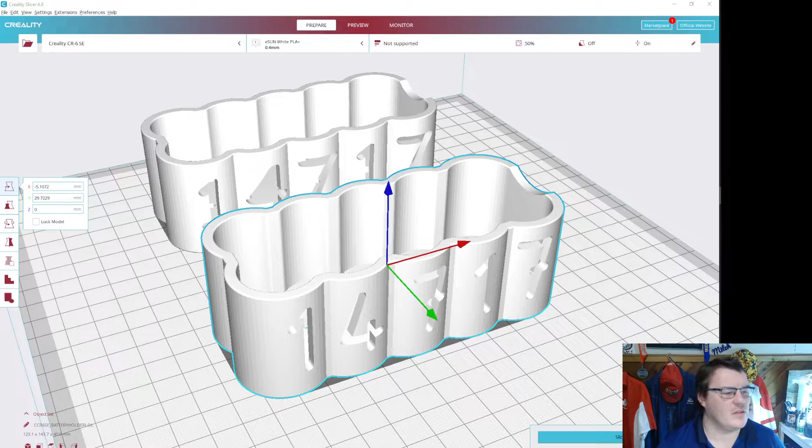First of all, kudos to the guys for actually pulling this one off. This is a very nice battery holder. It actually has a few features here. It has the Rev pattern on the bottom to attach to a bar, it has the team number built right in, which I think is value added in a couple of different forms, and it looks like it's contoured to the battery.

Now, it left me with a couple of questions, and I wanted to walk everyone through how to design one of these with a couple more advanced features. Of course, this video is going to be sent back to my team for next week so they can re-engineer these and we can take another shot at them.

That being said, let's jump into Fusion 360. Now, in Fusion 360, I've got a few things going here. First of all, I've got an untitled document. I'm going to draw this up as if you're a relative beginner to Fusion 360. I want to walk you through the steps, show you a few things, and hopefully you learn something from this.

With Fusion 360, we start with an untitled document. I'm in a folder right now called Team 15259, which is another one of our FTC teams. I'm going to save this here because it's someplace I'll be able to find it. Battery holder — give it a good descriptive name, something you can work with. If I have more than one battery holder, I might be more descriptive on that one.

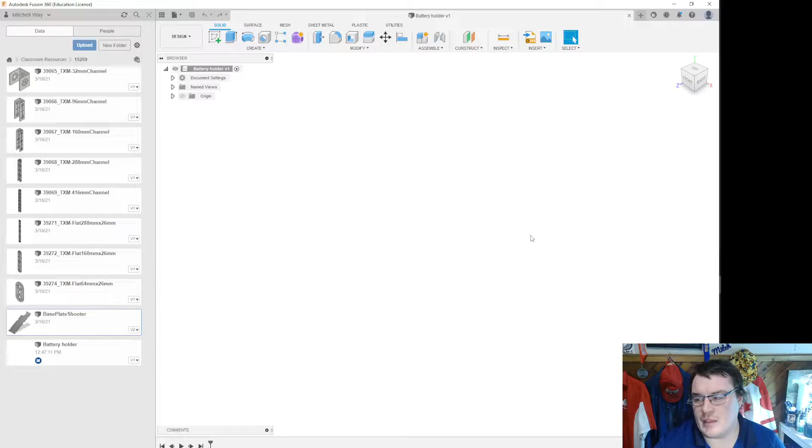Now, for this battery holder, I'm going to need a couple things. I'm going to need the Rev bar that it attaches to, or the actual Rev part. I'm going to need the Tetrix bar that it's going to be attached to, or the measurements of the Tetrix bar that it's going to be attached to.

Now, I just want to throw out a shout out here to Team 542, who has one of the best Tetrix reference dimensions pages on the internet. They do a great job, and I often use these to actually draw out the patterns. So I'm going to show you how to draw the pattern, and I'm also going to show you how to just project the pattern. That's going to require a few different tools.

The other thing I've got here is these actual bars. I'm going to upload the battery part for Rev, and for Tetrix, so that I get the actual part I need to base the design off of. So I'm going to go to upload, jump into my test prints, my desktop, and into my CAD library. I've got CAD files here — Rev, FTC kit parts from Studica, and Tetrix.

Now, the actual part you want for this is 39057, or whatever part number your battery has. In order to actually find these step files, for those brand new to this type of CAD, you can jump onto most suppliers' websites.

So here we have Tetrix, we have the battery we're about to work with, and we actually have a download button down here, and you can see they've provided the step file for this one, which is excellent. I already have it downloaded, so I'm going to upload it into this folder. Another good idea in CAD is to have a master part file folder, so you can bring parts over from it. Right now we're going to do this because it's a little more convenient, and we'll make it go from there.

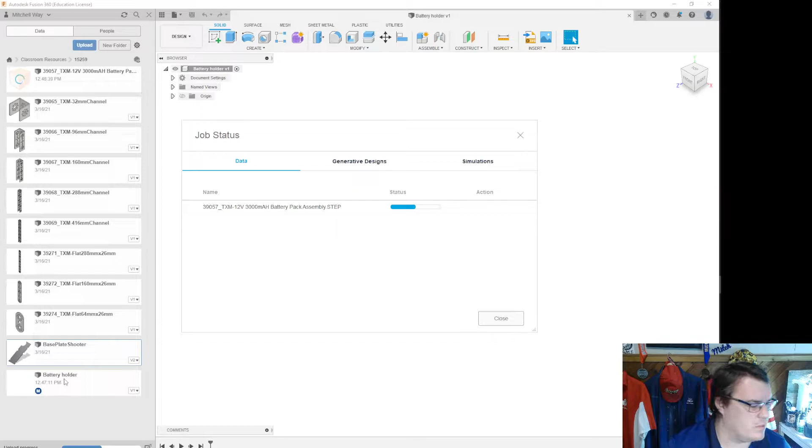Now, when we're here, we've got this battery holder, and I'm just going to close this down. This upload is going to continue, and we're going to get ourselves stuck in here on what the actual interface is and some of the important tools. The very first of which is that we are going to bring this battery into this drawing by clicking and dragging, and this is going to create a new component.

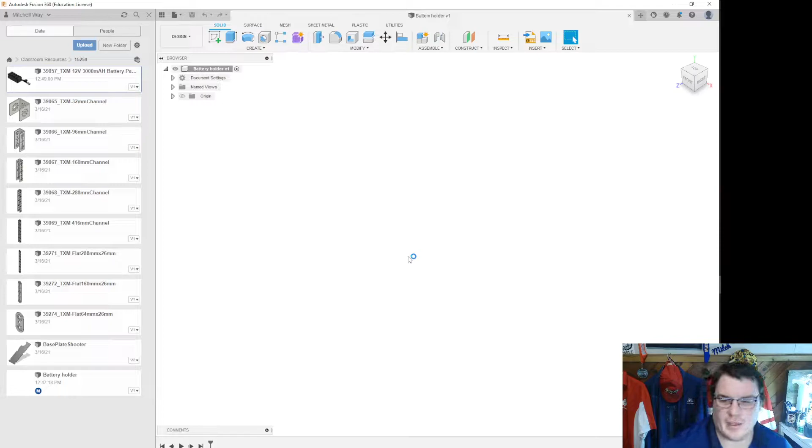Now, up here in this browser menu in the top left, we have all of our components listed, and we're going to be creating a couple of different things. We're going to be creating what's called a body, which is kind of like a component in progress to try to build the battery holder, but I actually want the battery here so I can measure things from it, because that's very important. I'm just going to drop it in the middle, as long as it's oriented so the top side is up.

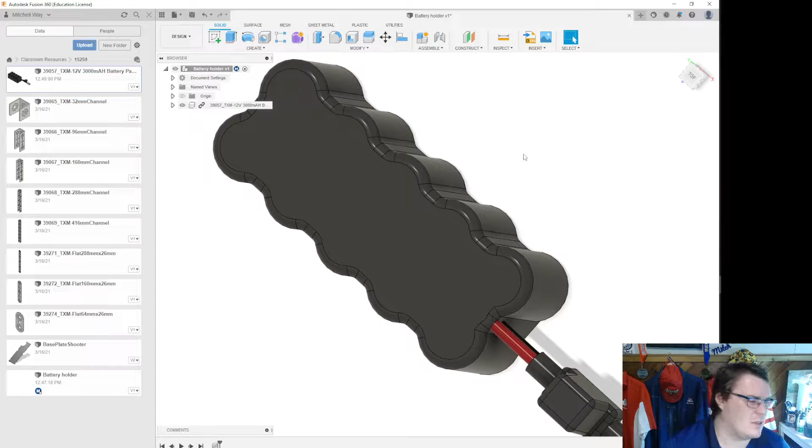There's no problems there. Now, I'm going to make some design decisions here. Unlike my team, who decided to make a battery holder that followed all of the contours of this, I'm actually going to make a battery holder that follows the contours on the inside, but is probably rectangular on the outside. And I'll show you why in a bit, because they missed a part that I think is going to make this way more functional.

Now, we're going to start every drawing with a sketch. So to start this, I'm going to create the outside shell for this particular battery. That shell is simply going to give us something to start working with. So what I'm going to do is see what I have to work with here. I think the easiest thing to shell this based off of is going to be the top panel right here.

So I'm going to start with a sketch, and I'm going to click this top panel. Now you notice we jump into 2 dimensions, and I can select the top face of whatever we had there. If I want to bring in faces that weren't part of that selection initially, I can use this button up here called Project. Your Project button is down here in the Create menu, but mine has simply been use the 3 dots here, and I've pinned it to my toolbar because I use this tool a lot.

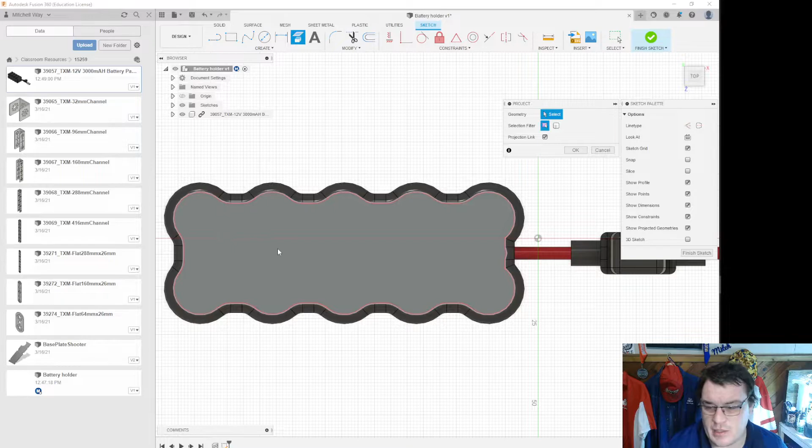So here we go, let's project out what we need. In this case, I'm just going to project out the top of this. I don't need to do this because I started with it in my selection pane, but it's going to make this next step a little bit easier.

All right, now what I'm going to do is use what's called an offset button. It should be up here in your toolbar. I'm just temporarily going to close this bar down so we can see more. And with the offset, we can select that line we just created and offset it a certain distance.

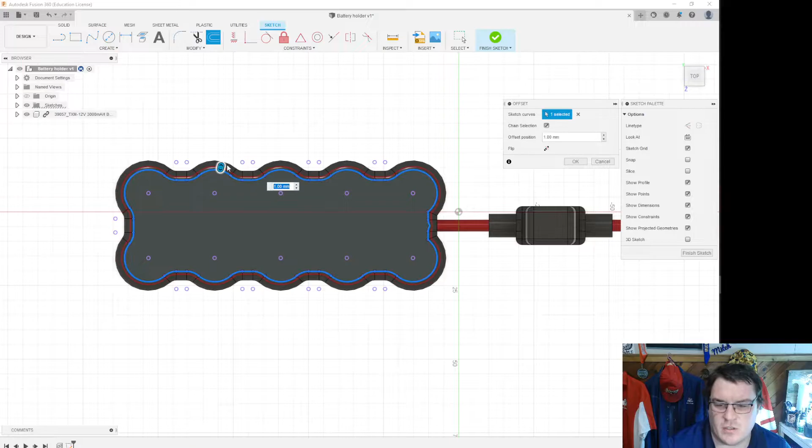Now, one of the things the team did that I didn't like as much is I think they just used the outside of the battery as their offset. If that's the case, that's not so good, because when you 3D print this, you're going to add somewhere in the neighborhood of a tenth to a fifth of a millimeter to the edge of all your prints, just because of how nozzles often work, depending on how your printer's calibrated. That means I want to make sure I have a little bit of space. If this battery moves around by a little bit, I'm not that concerned.

If it's too tight, we might have a problem. So I'm going to pop it out here, and just to see what I've got, I'm going to zoom in on a part of it to see what the gap is between the battery and what's now going to be the holder. I'm going to do a project on one of these lines so I can select it.

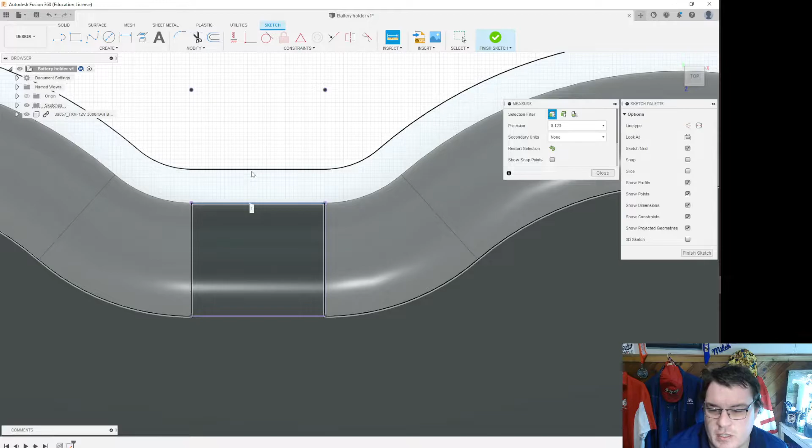I have a couple choices. I can use my inspect tool here, which is actually really good, and inspect the distance between these two at 0.9 millimeters. I think a less than 1 millimeter gap on each side is probably something I can live with, especially with the tolerances of batteries—they may not be exactly manufactured to what they're supposed to be. So we're pretty much guaranteed that we've got something that will work here.

Now, from here, I'm simply going to decide what I want to be the outside of my battery here. I said I was going to do a rectangle on the outside of this one—debating on that decision right now. Let's do this, let's grab... yeah, we are going to do that. We're going to use that same offset tool here to get started.

In this case, I am going to—oh no, we're not going to use the offset tool. We're going to use a line tool here and drag out a new line. Now I have a couple choices of kinds of lines I can work with. I can work with actual lines that are going to affect the drawing, the model itself, or I can click over here to use my construction line.

Construction lines are cool. They allow us to draw a line, and if you notice here, the line itself, which right now is vertical, is going to be a dashed line. Dashed lines mean it's not actually going to affect the actual part itself—it's just going to be used as a drawing line to reference things.

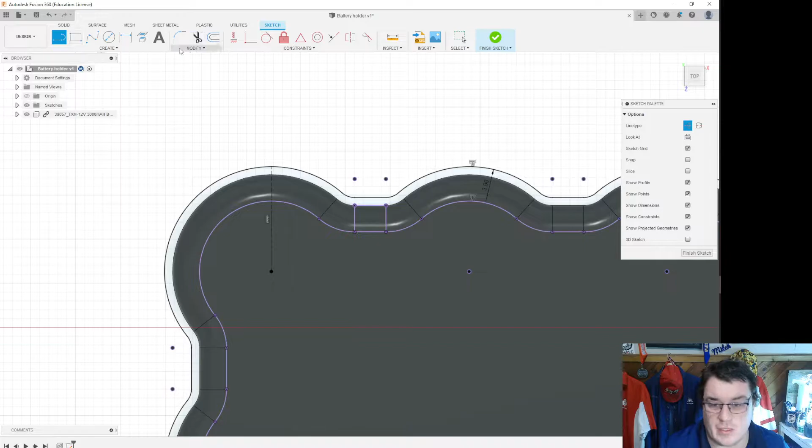I might want to throw a dimension on this and see what its dimension is. It says adding this dimension will over-constrain the sketch—click OK to create a driven dimension. Okay, I'll click OK. It will over-constrain the sketch, but I was just using this to measure—this is 11.9, 11.9.

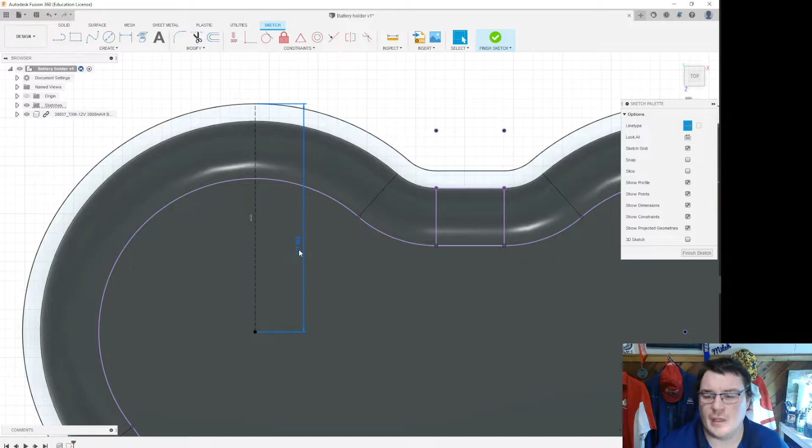There we go. Now I'm going to decide how far out I want to go for the rest of my container here, the rest of my edge. I'm probably going to make my edge, I think 5 millimeters is probably about right. So I'm going to add another construction line 5 millimeters out.

Now I'm going to do the exact same thing down here—go to the edge, straighten it out, then go 5 more millimeters out. The purpose behind this was just to create a marker point to put the edge of my rectangle. Actually, looking at this now, I don't want it to be 5 millimeters—I probably want it closer to 3. Let's see what this looks like, and then we'll jump back there.

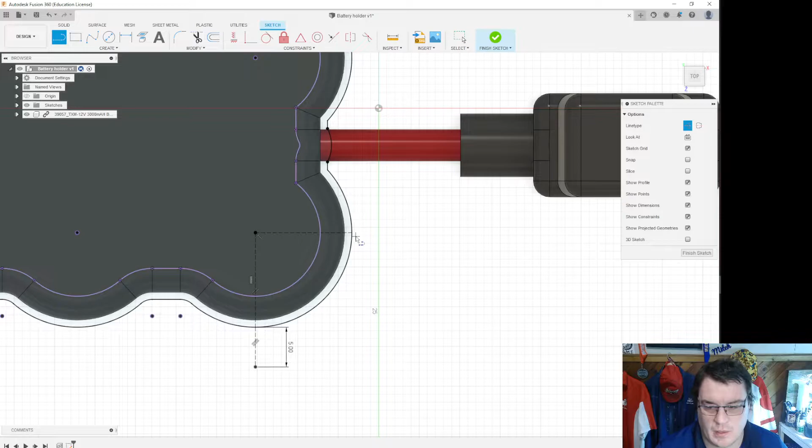Okay, I'm going to do the exact same thing on the other side. I'm just creating a reference line as to where I want to put this, and specifically where I want to put my overall shape here. There and there. Now, the shape I'm talking about here is actually going to be the outside of our shape.

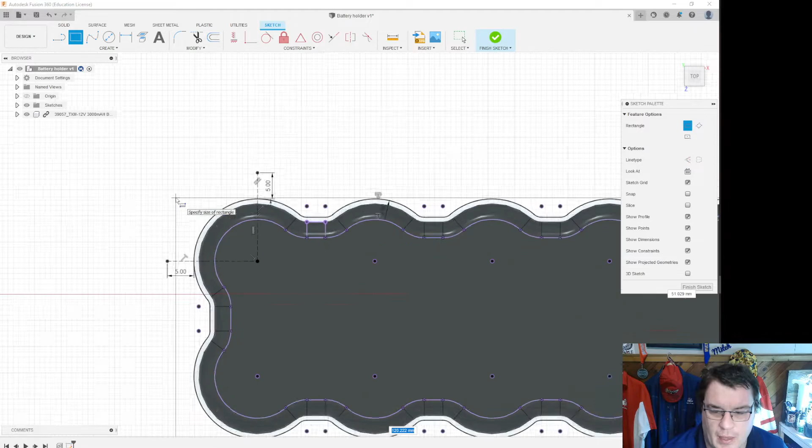I'm going to turn my construction line off. I'll click my 2-point rectangle and float over these edges. When you float over the edge of one of these, you get these little snap lines. Snap lines are important in CAD—let me zoom in on the snap line process. Float over this one, and you can see I can follow it along exactly perpendicular to the line itself, or actually anything along the ortho plane here. And I'm going to click.

Now, because of what I've done here, I have the outside of a battery holder, and just looking at it, I don't mind it.

If I take these numbers here, this 5, and let's say I suddenly want this to be 4, you can see that me moving the number on that line actually moved the rest of the rectangle. So we might turn around, I'm just going to click undo on that one.

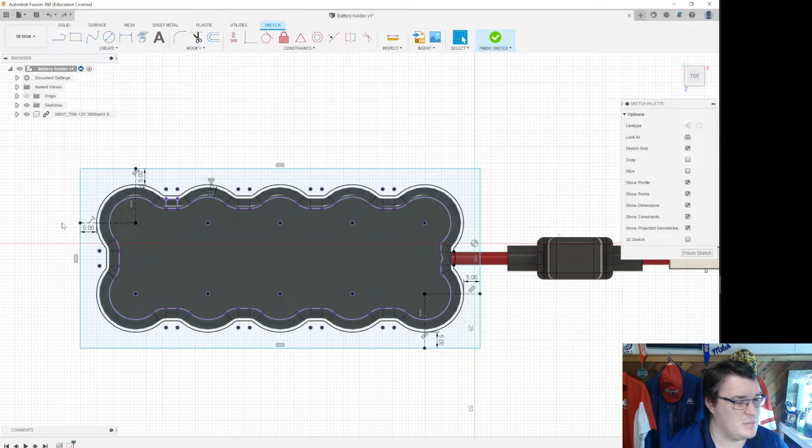I actually like 5 millimeters. I think this is going to be a pretty chunky battery holder, but your battery should stay in place. Our team had a bad experience last week in a virtual competition where the battery bounced out of the robot. We're going to talk about a feature of this that will actually make that not happen, which is very value added.

I'm going to zoom up here. I've got the top of my battery, and I actually kind of like the shape of this battery holder. One thing I might do at this point is throw what's called a fillet on it. A fillet is just simply going to allow me to round off the corners, because I do kind of want to round off the corners. I think that has really nice style to it. There we go. Now that I've got that, we can press finish sketch.

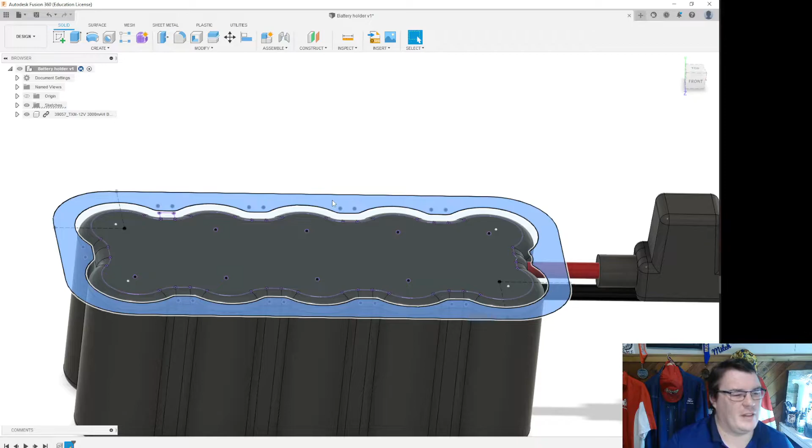Now what you can see here is I actually have an inner drawing, a middle drawing, and an outer drawing. Now that unto itself is not important. All I care about is that when I click on that outer drawing, it turns blue. If it does not turn blue and have a shape on it like this, it means I haven't closed one of my loops, I haven't connected two lines somewhere. If I haven't done that, this isn't going to work very well.

Now what I'm going to do is use the exact height of this battery to actually make this holder, because I don't want it bouncing up and down at all. A little bit of side to side is not going to harm anyone, but up and down is going to be a bit of a problem.

I'm going to click extrude, which is your button up here now that we're in the 3D menu. Since I've already selected the shape, it's going to let me extrude. If I haven't selected the shape already, I can click extrude and click on the outside here. Okay, now I can click up and down.

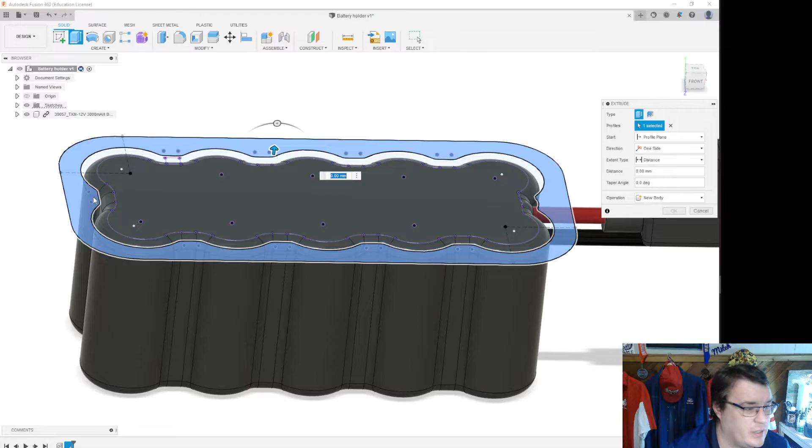I actually have a menu over here, and the menu is going to let me do all sorts of things. I'm going to select one side because I really only need this to go in one direction, but if I was at the middle of an object, I could go both directions. Okay, I can choose my distance, but I actually want to choose to an object.

What I'm going to do is click on the bottom of the battery, and that's automatically going to, if we look on the front view with the view cube, make this the exact height of the battery, which is awesome. That's exactly what I want right now. I'm going to make this as a new body. What we're going to do is eventually turn this all into components, but for right now, a body is not a bad way to go.

Now what you see we've got here, we actually have the startings of a battery holder. Actually, the startings of a really cool battery holder. I'm going to build the bottom, and I'm going to build a cutout right here for the battery itself, and then we're going to build a bracket so that nothing can bounce out of this battery holder. That's part of the reason we made the outside of this rectangular instead of making it wavy like the other design did. We're also going to cut our team numbers into this, which is going to be another tactic here. But let's start with the bottom.

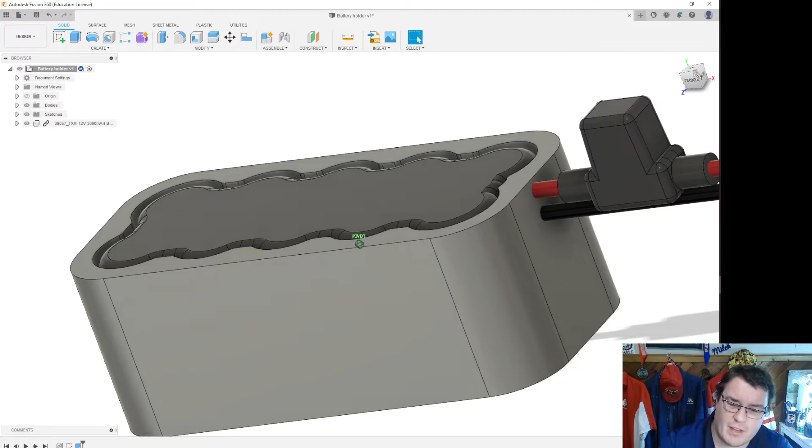We made this whole thing 5 millimeters thick. We could go bigger or smaller depending on what you want to do, but what we're going to do now is put a bottom on it. The bottom is super easy. We're simply going to click on create sketch, and click on the bottom of the battery. Doing that and clicking on the bottom of the battery to create the sketch means we bring this object into our sketch plane.

Notice that I can still select the battery because it's an object to itself, but this is really what I care about. Believe it or not, I don't have to add anything to this sketch right now at this moment.

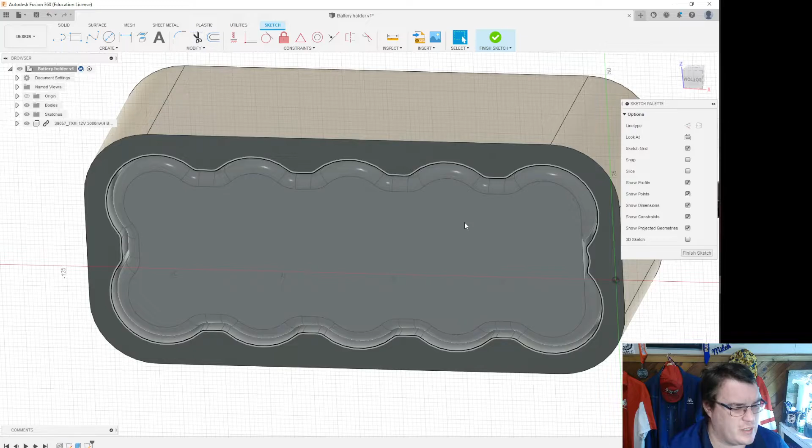Until I want to cut the Tetrix holes into the bottom of it, and I can do that as in this step or as an extra step. If I choose to do it in this step, I'm going to have to go back a step. So I'm going to finish this and do it as an extra step, as an extra extrusion so that I can actually cut the holes in the bottom of this plate. I'm going to click finish sketch.

Now that means that I can select the bottom of this and I can actually use an extrusion on it. I can also use an extrusion on the negative space in the middle, which is awesome because this is going to let me create a 5 millimeter edge on here.

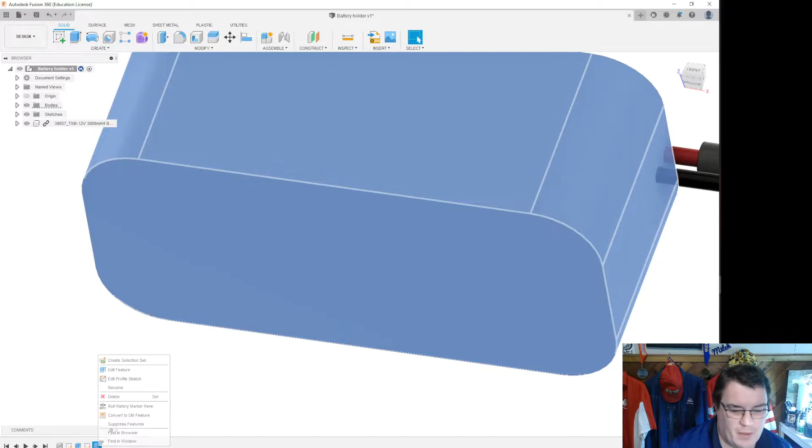Now, if you want to know what you've done in your drawing, at the bottom here you have a timeline, so you can actually go step by step through it. This shows me that my last step was an extrusion. If I want to edit it, I can actually right click down here and edit the feature. This means that when I go through the menu, I can see what I did because I missed something.

Notice this bottom piece, this operation says join. I actually have the option of making this a brand new body, which I don't want to do. I want to join or merge this onto the previous body because they're all going to be the same 3D print. From here, I can press OK.

Now what you see I've got is really the trappings of a really good starter battery holder. Let's do a couple things here. I'm going to cut out the outside here, and the team did a great job of this one.

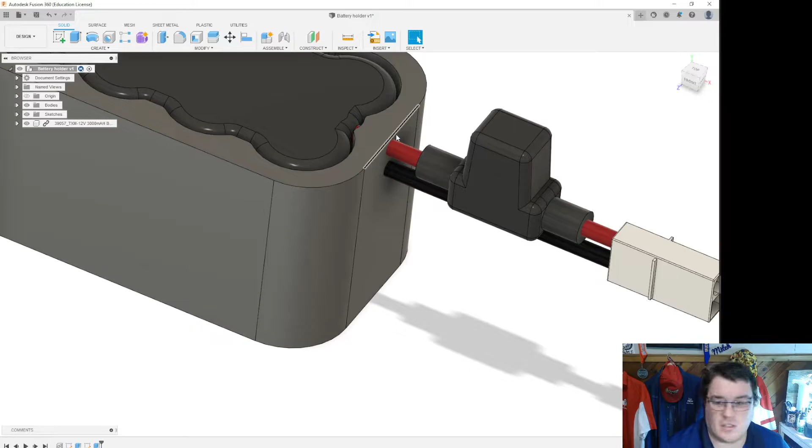What I'm going to do as the very first thing is click on this side of the object here so that I can get in here and figure out what shape I need.

Now, a few options here. I'm going to recommend that I just create a construction line here, something to line me up along center. Actually, I don't even need to do that. I can just start my circle around center. Now, this one does not have to be particularly precise. I just need to make sure that I'm out of the way for the wire.

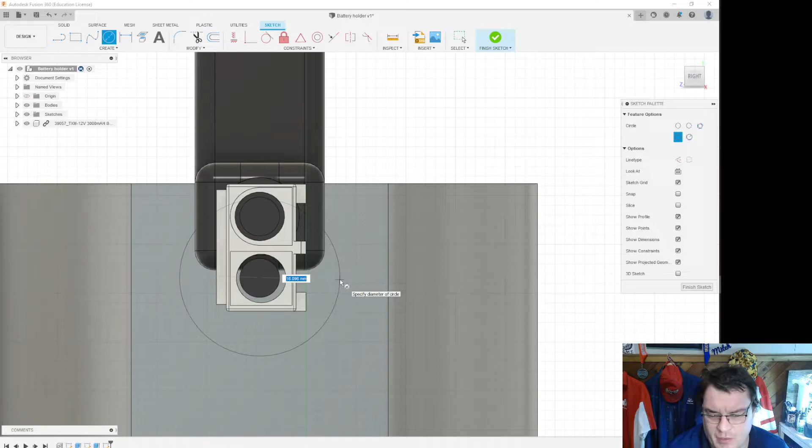Now, you notice that when I float along this top of this object, I get this little triangle right here. The triangle is important because that means it's the center of that line, which means I've centered my battery. I'm going to scroll down, say an arbitrary amount here, and just pop a circle on the side of here. I can say 16 millimeters because it's a nice round number.

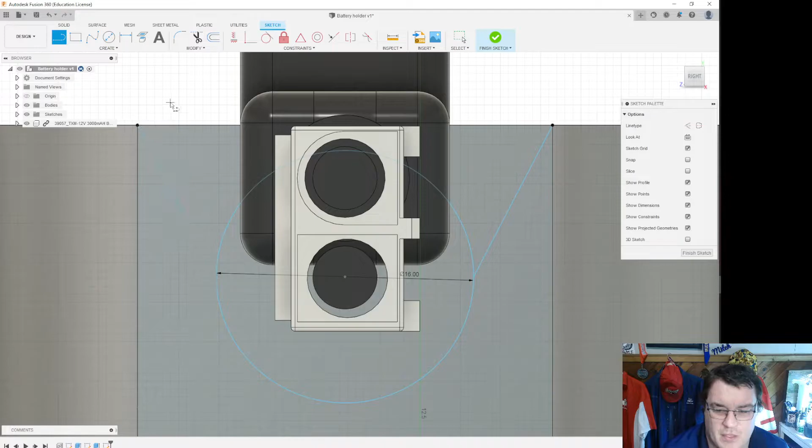That's going to give me a circle that I can work with. From there, I'm actually going to cut it with 2 lines straight down, just so that I can get this cut out. We could also go fancy, we could go right to the corners. Why don't we do that? We're going to float along the middle, and we're going to scroll along at a 90-degree angle along the side here, and then connect this back up to the edges. Again, we're just utilizing what's called an ortho snap here, which is the snapping to vertical or a horizontal line in this case.

Now, you'll notice that I have this top object and this bottom object. I'm actually going to use the trim function and cut off the top of this object. Then I'm going to scroll around, and I can just see in my drawing that this is going to cut out enough plastic to make there be enough space for this, which is awesome.

That's exactly what I need. Now, if I try to extrude this right now by finishing my sketch and clicking extrude, I'm going to run into a little bit of a problem. Because what's going to happen is I'm actually going to notice that it turned red.

It's now doing what's called a cut function, and you'll notice that it's actually trying to cut out the cable of the battery model as well. Well, I don't want that. I want that cable to run through this gap.

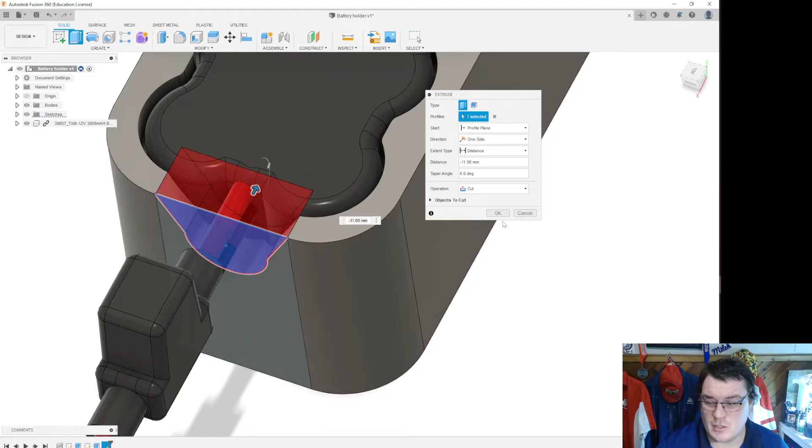So before I extrude, I actually have to go back into my menu up here. I have to look at my battery, and I have to click the little eye next to it. The little eye is going to make the battery disappear. Did it disappear forever? No, it's just hidden. But as long as it's hidden, anything that I extrude...

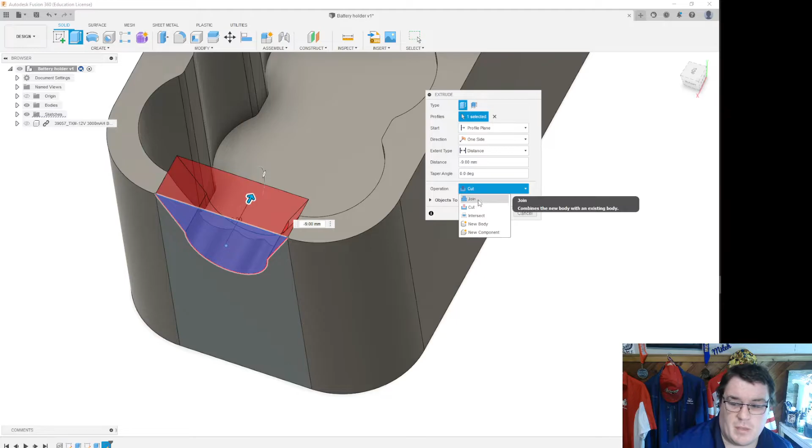I'm just going to pick an arbitrary amount to cut through here. In this case, it's negative 9 millimeters. Notice that my menu says cut now instead of join, and I have some choices.

I'm actually going to go to object. I'm going to do this entirely properly, and I'm just going to jump it to the edge of this object so it cuts out exactly how much it has to. The reason I want to go to object is if I ended up changing any of the other parameters in this design, if I went back a few steps and changed, let's say, the thickness of the shell, this will preserve the actual design. It'll actually keep it into a place that we can still work with it.

Now, at this point, if I turn my battery back on, you can see it actually fits really nicely. Nothing wrong with that at all.

All right, so 3 more steps actually. We're going to add the Tetrix holes on the bottom of this battery, and after we're done that, we're going to add the numbers to the front of this battery holder, and then we're going to add a little clip on top so that the battery can't bounce out. All real value-added things that we can do to this.

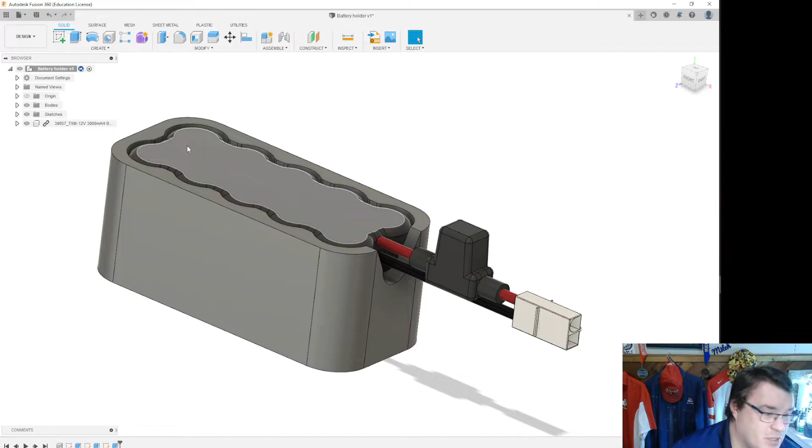So let's start. We're going to start with the Tetrix holes. I'm going to go back to my file menu. I'm going to grab a Tetrix bar, in this case 160 millimeter channel, and I'm going to bring it into my drawing here.

Now, we're going to arrange it so that it's aligned about the same as this, and again, depending on how you want to mount your actual model together will determine how you want to do this. In this case, I'm pretty sure my team wants to actually mount the battery holder directly on top of a Tetrix bar. That's kind of the implication I'm getting from this particular design here, so I think we're going to go ahead and work with that.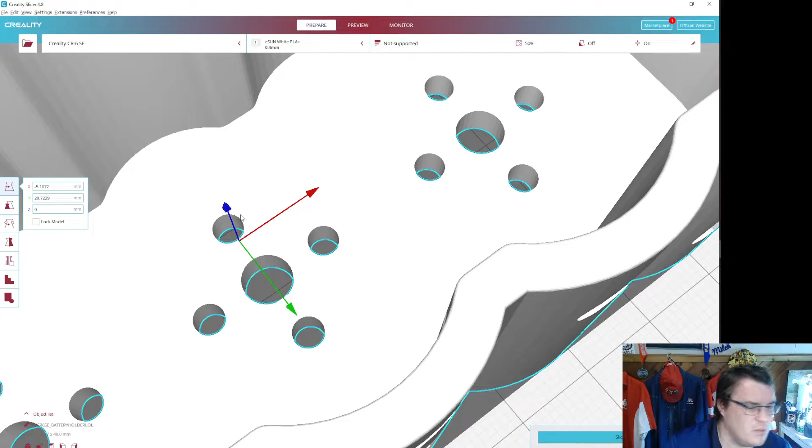Now, one of the problems that I identified in their critique of this was that this Tetrix bar, this is all good, there's nothing wrong with this design, but there's going to be a battery sitting on this. If there's a battery sitting on it and there's bolt heads protruding, they're going to embed themselves in the battery, and that could potentially be dangerous. So we actually have to make sure that we build a countersink into these. We're actually going to embed these so that we can put this on the bar without actually damaging the battery.

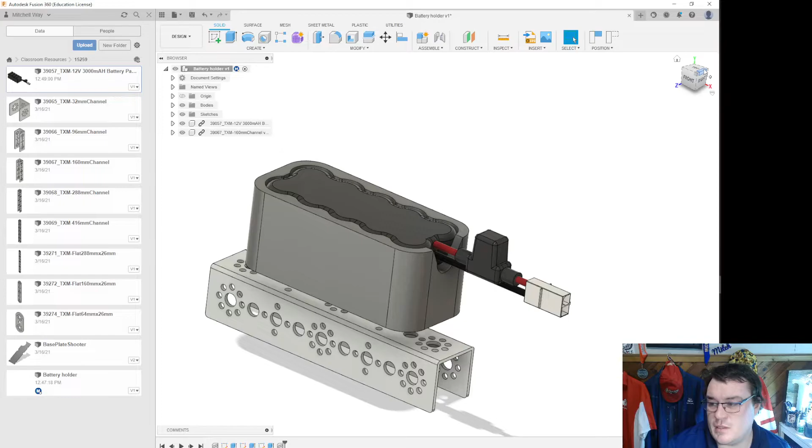So let's do that. We're going to align the Tetrix bar, and I'm going to play around with a new tool. It's called the Align tool. Right now, just taking a look at this, seeing how I want to do this. The Align tool is up here in the Modify tab, and you can see mine is actually tagged to the toolbar. Again, yours may or may not be.

And I want to align basically the center of this Tetrix bar to the center of this battery holder. But right now I'm realizing that I don't have anything in the middle of there, nothing I can actually move or align to. There's no snap points, which is a little bit problematic.

So I'm actually going to add some planes to this. I'm going to go up to construct here, and you'll notice that I'm going to capture position. I actually have the option here of creating a whole bunch of different kinds of planes.

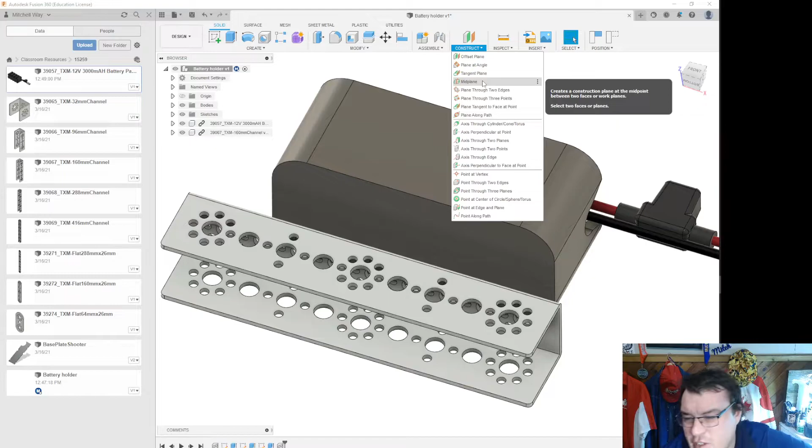In this case, the one I'm going to work with is called a mid-plane, and I want to create planes so I can connect these two objects. I'm going to go mid-plane, capture my positions, and click both sides of this battery holder. When I press OK, it's going to put a plane right through the middle of the battery holder, dead center, which is what I need right now.

I'm then going to construct another mid-plane, going from this side to this side, and that's going to create another plane, or at least it should. Ooh, I've created two of the same planes. I'm going to hit undo because I obviously wasn't paying enough attention to that one. In this case, I'm going to go from this side over here to this side, and that's going to create two planes that are going to cross each other.

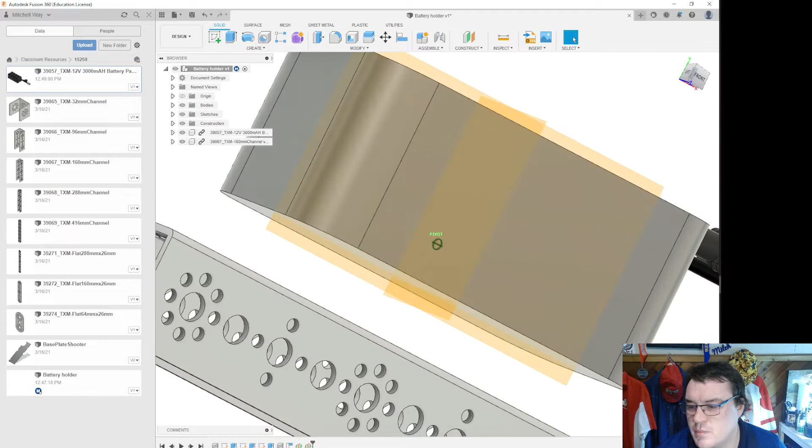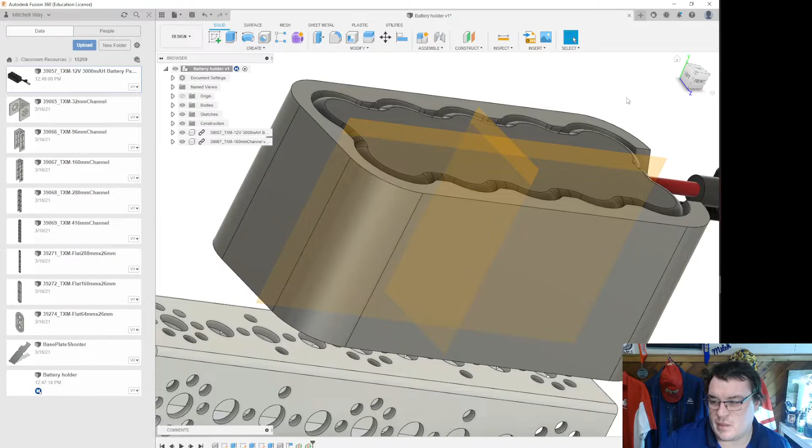So now I have to go see, do I have an option to put a point through to a pointed vertex? I might. No, I don't. Okay. I think I should actually be able to work with those two things, because this should allow me the ability to do the same thing. Actually, let me just float over. I might just be able to snap to the middle of a circle here.

So we're going to use our align command. The align command is simply letting you move an object onto or towards another object. So what I want to do is take the center of this circle and align it with the vertex, or the point where these planes meet. Selecting it might be a little tricky, but there we go. We got it. Okay, now you can see that it aligned all the centers where they're supposed to be. This is awesome.

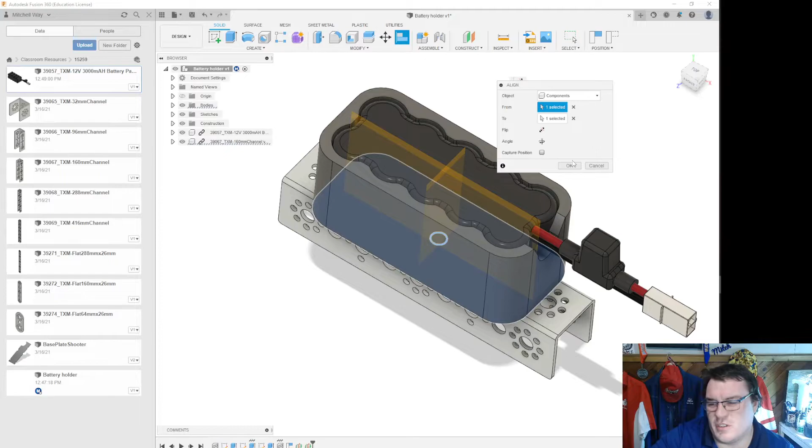The reason I'm doing this now is because I want to make sure I get this Tetrix bar exactly where I want to, because that's where the holes are going to be. You can see it actually didn't quite do the same thing I wanted, so if I click angle, I can turn which direction it's moving and make sure this gets well centered. Now, you may not want this centered - you may want this battery holder off on one side of the bar. That's your prerogative. This method you use here, just make sure you snap to something slightly different.

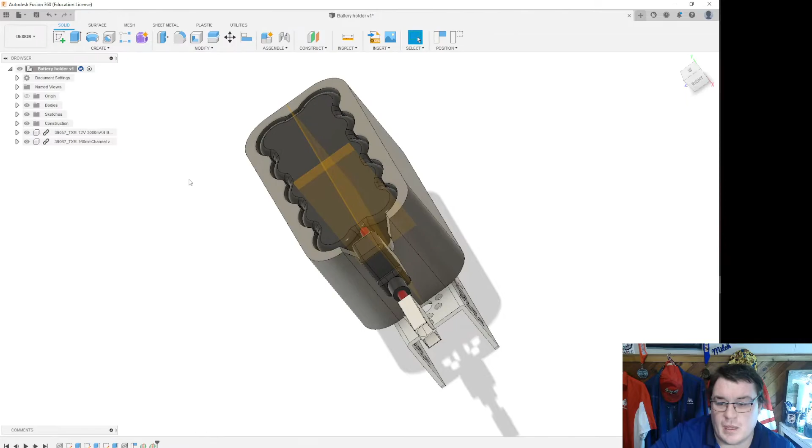Press OK. Now, in order to cut those holes, I'm obviously going to have to make the battery go away. We're going to do the same trick we did before. I'm just going to make my notes, or my file system, go away here. I'm going to spin around my view cube, and I'm going to make my battery go away.

Now I obviously don't need these planes anymore. If you look over here, it should be under my bodies - oh no, I may just have to manually click on these. If I right click on these, I can do a show/hide thing, and I can make them - they're still there, but just hidden for right now. Oh, they're under the construction tab here. I've got multiple planes in construction, and they are now hidden or not hidden, so I can see or not see what I want to.

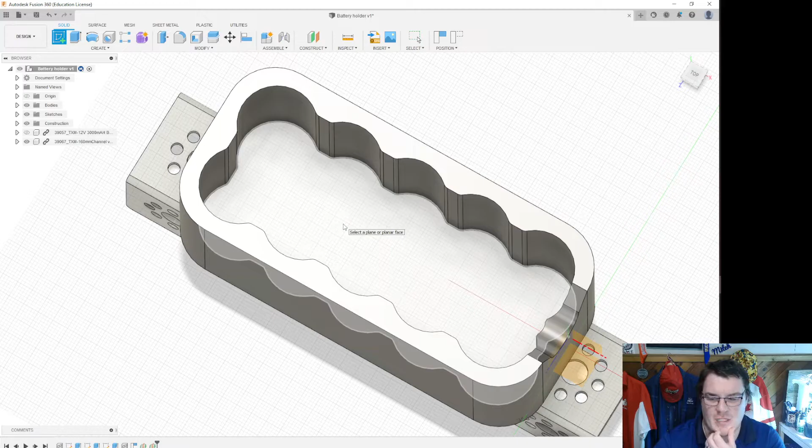Okay, from here, we're going to cut some holes into this. How I'm going to do that is I'm going to click a new sketch and select the actual bottom of my battery holder. Again, we can capture position whenever we want because we're moving stuff around. Now, obviously it's going to be really hard to draw those Tetrix patterns on the bottom of this because they're on the bottom. How do I align this?

The answer to that question is this project tool. Again, in your create menu, if you click on that project tool, you're actually going to be able to draw. Let me show you this - this is neat to do. Oh, there's my sketch tool right there. So I don't need all these holes - I probably only need a few of them. I think I'm going to use the four 3.7 millimeter holes on the side here, actually.

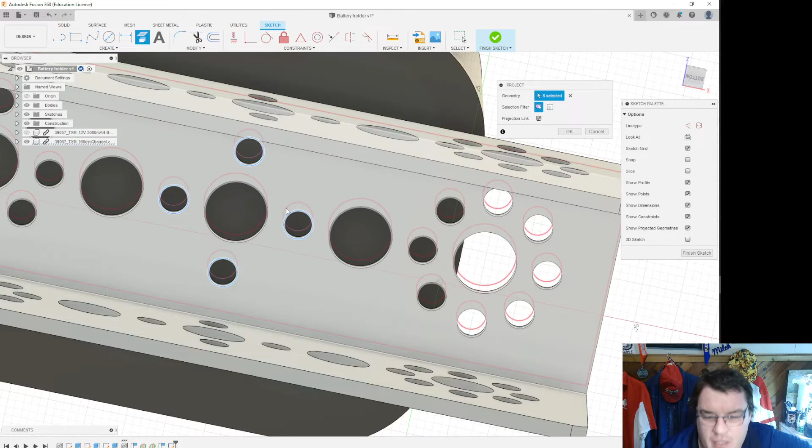Watch what happens when I click on these 4 circles here. I can click on the whole bar if I want the whole shebang. I want all of these, but really these are the ones that I kind of want. They're going to give me enough stability without popping holes everywhere.

Now, you may decide, and I'm suspicious my team might decide, that they actually want more. They probably want these big ones as well, because we're going to talk a little bit about lightening holes to actually make this design a little bit less weighty, use less 3D printed plastic, that sort of thing.

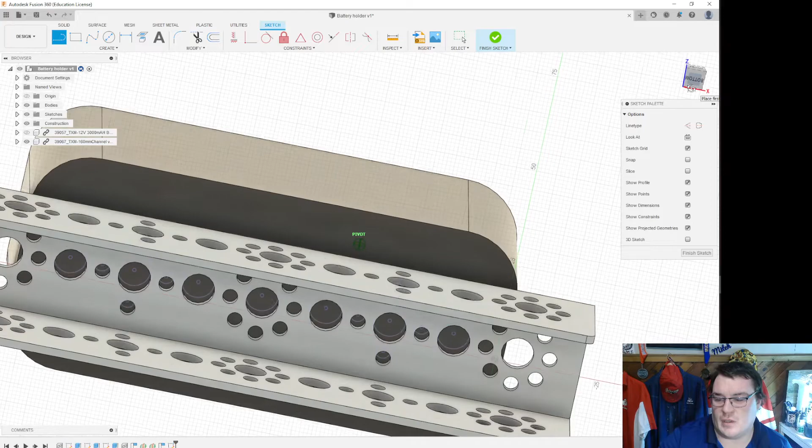Okay, from here, I'm going to go back up to the top of my drawing, and you'll notice that in my projection, I've now brought all of those holes that I brought through into the top of my drawing. They're all up into the top part.

That's awesome, because what I want to do when I finish my sketch is I now want to extrude those downwards, and I might have to click on them individually here. But in extruding them downwards, that's going to allow me, just like we've done before, to actually cut them through the bottom of this 3D printed part.

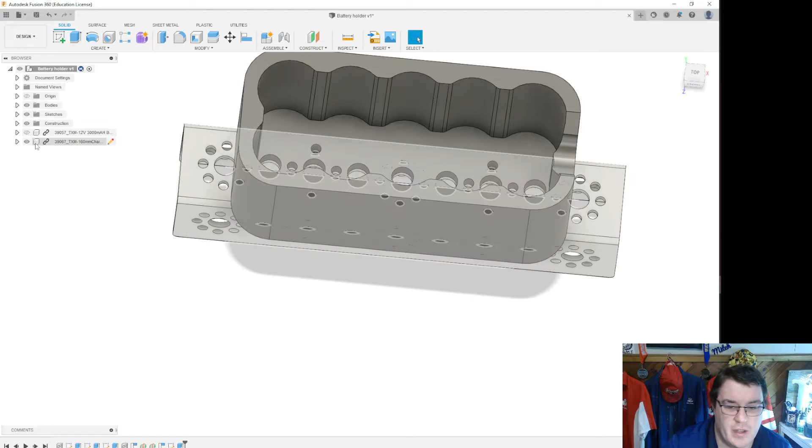Again, I'm going to use, instead of the distance, the to object tool, and I'm going to cut down to the bottom. Now, at this point, you can see I have some holes here. I'm going to make that channel go away because I don't really need it, but you can see that I now have the pattern I want in the bottom here.

Now, I specifically want to make sure that these holes have what's called a countersink in them so that I can actually bury the heads of my M3 bolts.

I'm just very quickly going to jump over to grab a reference for the 3mm bolts that I have here. Let me hop over to a site here and confirm the size of those. You should always have, when doing CAD with any kind of bolts that are floating around, something similar to a reference for the size of the screws. I just use this one from engineersedge.com.

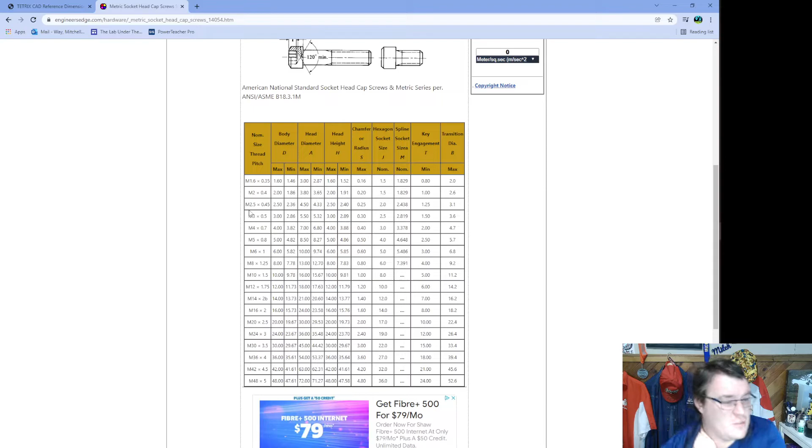I'm going to be using M3s on this one. I know it's a Tetrix tube, but it's still, oh no, you know what? It's a 3.7mm gap. Probably still going to use the sizing for M3s on these ones.

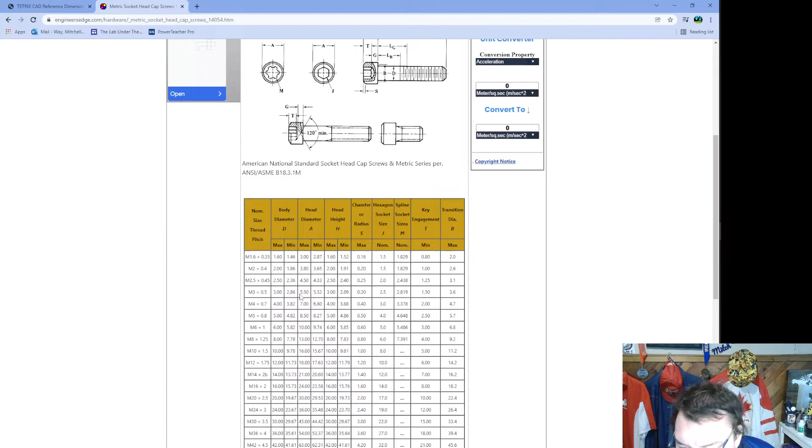Anyways, M3, you can see that the depth of the head here, H, is going to be about 3 millimeters. Okay, so we're going to aim for that. And we have the width of the head at A here is going to be about 5.5 millimeters. So let's go 3 and 5.5 for this drawing.

We're going to add a new sketch because I need to do a new level, another depth or distance here. So in this case, we're going to do that.

I'm going to actually click on the main panel or the main part of the drawing here because I am going to be able to use the holes and actually snap to their centers, which is going to be very nice. Okay, I'm going to click here and I see that I actually have a 3.7 wide hole already.

So I might actually have to jump over and grab my imperial bolt dimensions. We might have to actually attach this with imperial bolts. Again, I'm just going to jump into a new page here and grab the imperial bolt size. I'd have to do some conversions here. Standard bolt dimensions, here we go.

And hex bolts, I may not even have cap bolts here. You know what we're going to do? I don't have the specs here, but you're going to actually go out and find the exact height, exact width of your, in this case, number 10 heads, and you're going to go with that. I'm going to actually make them 8 millimeters just to be safe, but you're going to make them the exact size you need in this case.

If I need to go edit this sketch, I can, again, just go into the timeline and edit the sizes. Life is good from there.

Okay, I'm going to use a new tool on this one. I'm actually going to go down and use what's called a circular pattern. That allows me to select an object and it allows me to select a center point.

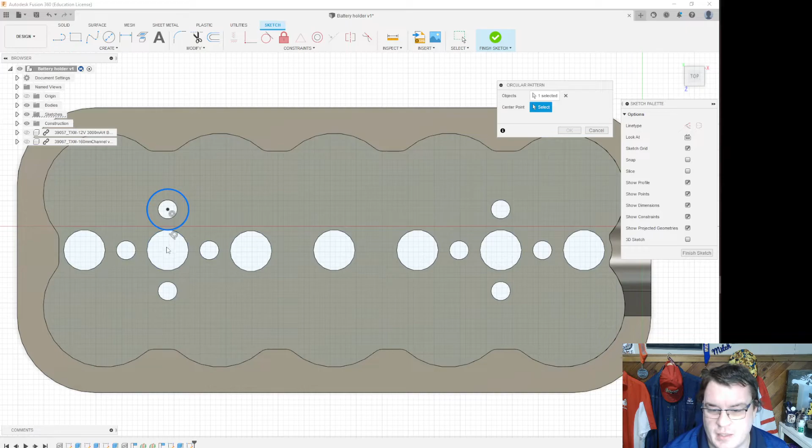In this case, I'll use the middle one. It then lets me select how many objects I want to make, and it's going to copy them over in a circle, which is super neat.

Okay, I'm going to use another command here called mirror, which is going to make life easy. I'm going to put a line down the middle here and make it a construction line. You can make things construction lines before or after you draw them.

And I'm actually going to go ahead and use the mirror command. It's in here in your, I believe, create menu. There we go. I'm just going to select those 4 circles that I have there that I'm going to countersink, and I'm going to use a mirror line, which is here. And they're going to copy over to the other side of my drawing.

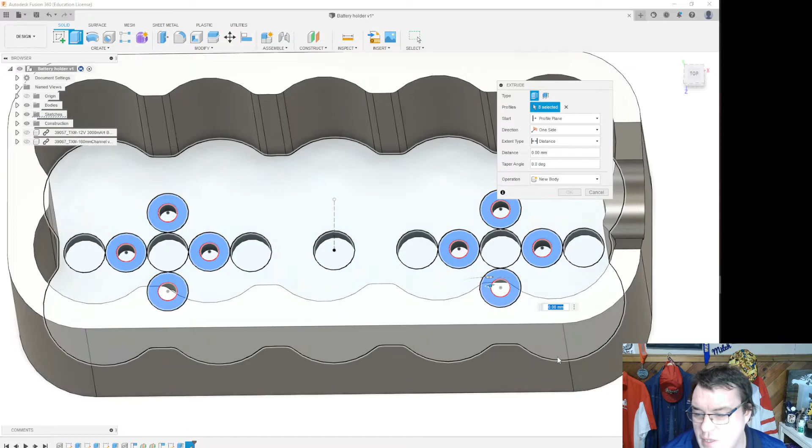Mirror command done. And from here, this actually makes life relatively easy because when I finish my sketch, I can simply go in and extrude those shapes that I just drew out. And I know that this is a 5 millimeter thick bottom to this, so I'm actually going to go -3 on this one.

And that's going to actually cut them into the bottom of the design so that they don't damage the battery. Those bolts will be nice and set in and they'll be nice and accessible and basically in a really good spot. Again, I like how light this bottom is going to be too. It's going to be really good for this robot.

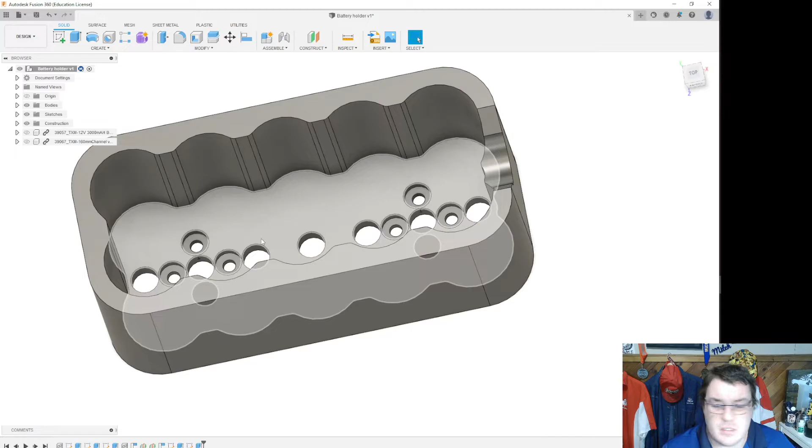All right, 2 more things. I'm going to put our team numbers in this. And after we're done with the team numbers, we are going to turn around and put a quick hold down clip in the thing and then call this a 3D print.

Team numbers are relatively easy. We create a new sketch on one side. We're going to take our text tool and use it to draw our team number. I'm going to put 14717 on this one because it's the team that sent me the original drawings. And I'm going to select our team branding choice of font, which is Impact.

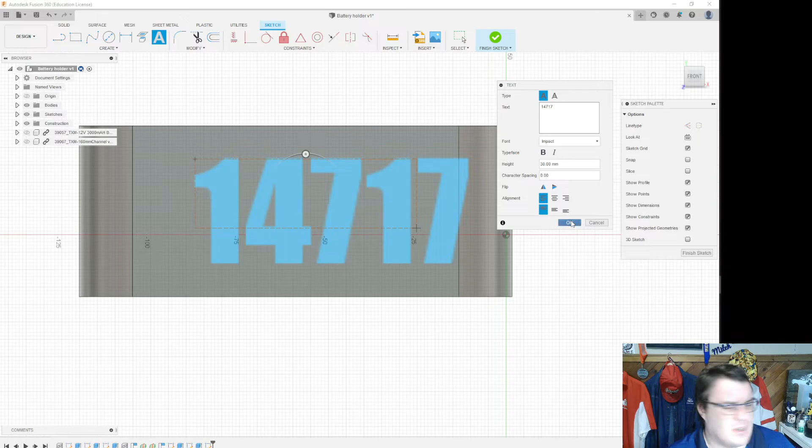And I'm going to make this thing relatively large, actually. I think this is 10 millimeter right now. I think I might actually go 30 millimeter. We'll make it big. Now, does it matter that I'm taking a lot of plastic out of this particular design, like that I'm using this in a big way? Not really. This 3D print's still going to be quite strong.

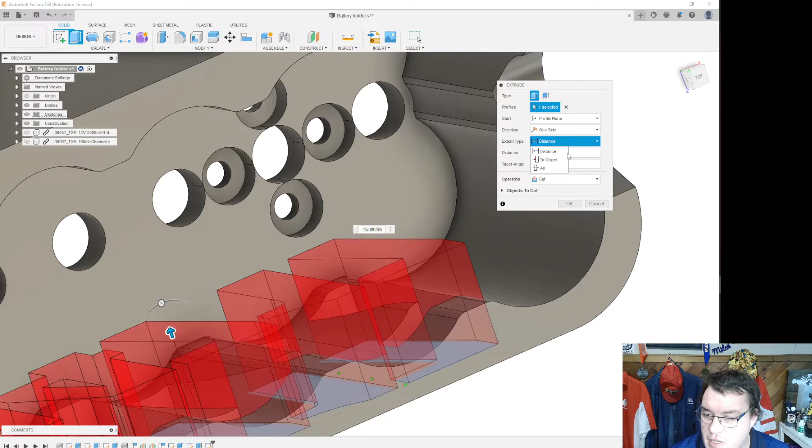Now, when I click finish here, you'll notice that I'm going to be able to actually extrude out these numbers, which is kind of what I was going for. It's going to let me actually cut them in here. And again, if I want to, I can do this completely properly, using the to object button to actually cut these back to an object so that this is now hollow on the inside and shows my team numbers.

Now, slight problem here. Everyone see that part of the number 4 there? That obviously will not print. That's a bit of a problem. Now, do I have some ways of getting around that? I probably could if I wanted to.

Easiest way is probably just to throw a new drawing on the front here. Project out part of that 4, and actually connect it to something. So we do this in one of our logos as well.

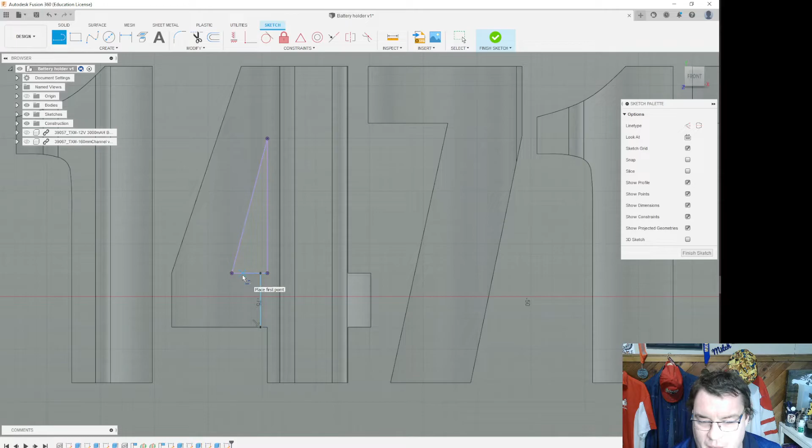I'm just going to simply do the thing they do in a lot of stencils and stuff, and add a couple bars there. Now, obviously, when you 3D print this section, these numbers are going to require a fair bit of support material that you're going to have to clean up afterwards. Get familiar with your Dremel. It'll make your life relatively easy on this one.

Okay, I'm just going to extrude this back. I'm going to spin it around and extrude it back, again using the to object button, to the back of the number 4. So it is—oh, what happened there? There we go. Oh, that back of that number 4 is curved, that's why. I'm going to keep this part way through, press OK, and that should hold that up just fine.

It should make it so that I can still see the number 4 and that it still looks like part of our logo. Excellent.

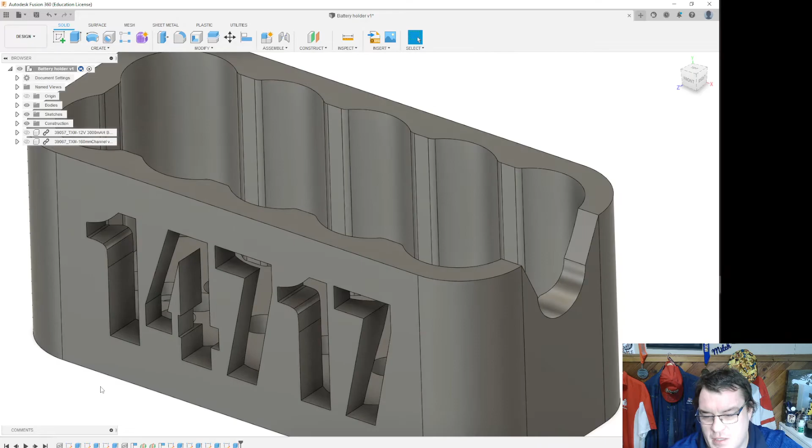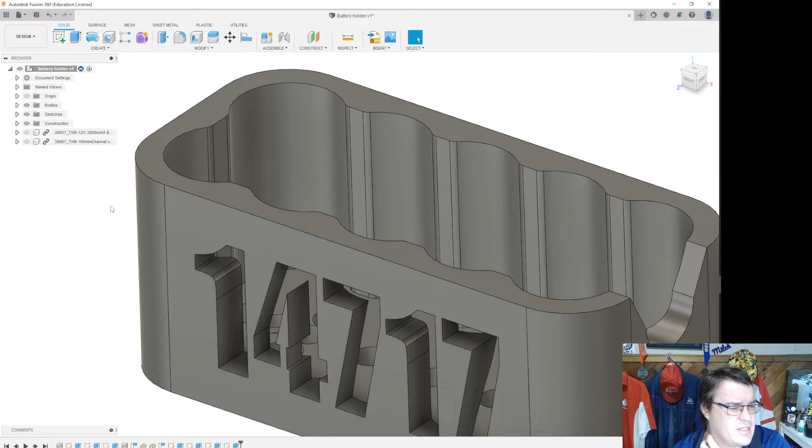We've got one last thing we're going to do. We're going to put a hold down clip on this. I know I've mixed some imperial and metric sizes here. I'm going to attach an M3 screw down into the design. We'll use an M3 by, I think, 16 millimeter screw. Might be a 20 millimeter bolt on this one.

We'll see. I know my battery here could potentially bounce up and down in this bracket, so I'm going to attach a little clip on this side that I can tie down, and even possibly just turn sideways on top of this battery clip. We're going to print it as a separate part and just attach it on.

Some versions of 3D printing of this, you might just use a very small wood screw and provide a hole in the 3D printed material. That's not a bad way to do it. We're going to get a little bit fancier than that. Since we're already doing some support material here, we're going to cut a little gap in this one.

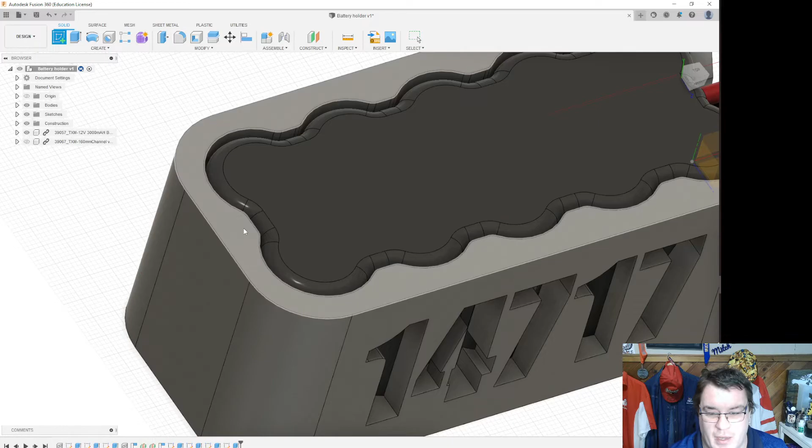First, let's create the top of this. We're going to do a new sketch, and I'm just going to create a little clip. It's going to be super easy. I'm going to draw a construction line from one side to the other, and create a hole in the middle.

That hole is going to be 3.1 millimeters. We're going to put a metric 3 millimeter bolt through there. The 0.1 is just going to provide a little bit of play if I need it. I could do it at 3 millimeters for a really tight fit. You know, that might not be a bad idea. Let's just go 3. Let me type it in correctly, and then make it not a construction line anymore.

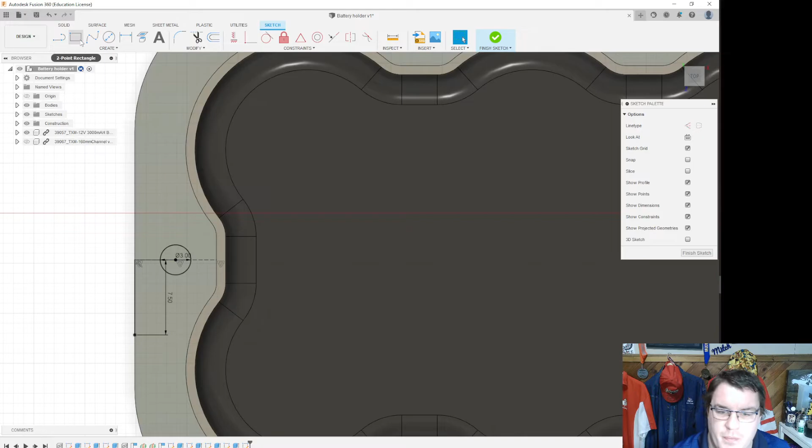From here I'm going to create the rest of this bracket using a rectangle. I'm not going to be particularly fancy, but let's make it specific — say, 7.5 millimeters wide. Grabbing our 2-point rectangle again, I'll drag this out. I'm going to make this 15 by using the tab key, then tab again and make it, sure, let's go 20 millimeters.

This is super easy, and again, we're just trying to create a tab of some sort to hold everything in place. If you want to get fancy, you can fillet the corners and make it a little bit round so there's no sharp edges — avoiding sharp edges on a battery is actually a pretty good idea.

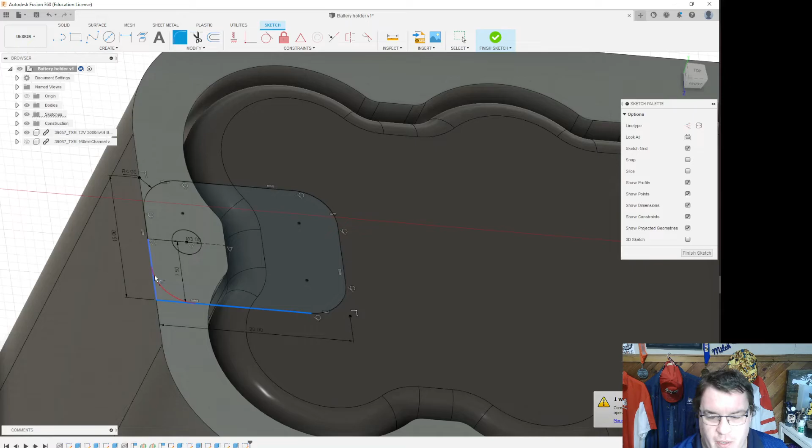Press finish. Now I'm just going to extrude out the parts of this I need, which are 2 pieces, and drag them up. Let's keep the 7.5 thing going — there's no right or wrong answer here. Now I've got about 7.5 millimeters of bolt running through here.

I may want to do that same maneuver we did before and provide a countersink on this. There's nothing wrong with that. I'm going to round up to 6 millimeters and cut this, countersinking it down, finish our sketch, countersink down by another 3 millimeters. Oop, clicked on too many things — let's try that again. There we go, nice little countersink so we can put a bolt in here.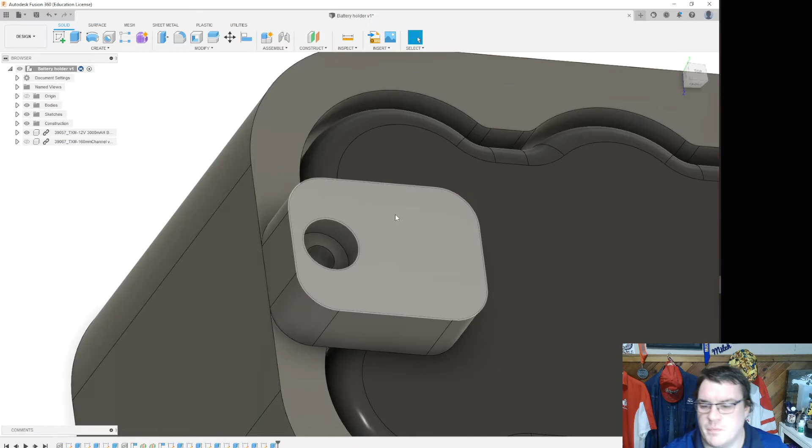Now, what are we going to attach this to? Excellent. Oh, one last thing.

You can fillet something in 3 dimensions, and I'm going to show you that right now. Up here in the Modify menu, we have a few tools we can play with. In this case, we're going to use the fillet because I could see this needing a fillet to make it look even cooler, a little more space age.

There's nothing wrong with that at all. You get creative with these ones, especially something like this that's really not a terribly structural element. It's just there to make things a little more functional.

Last thing, if we've got this bolt, we're going to run the bolt down through this plastic. I think I'm going to make a little access port so that we can actually access it from the other side. First of all, let's make the access port.

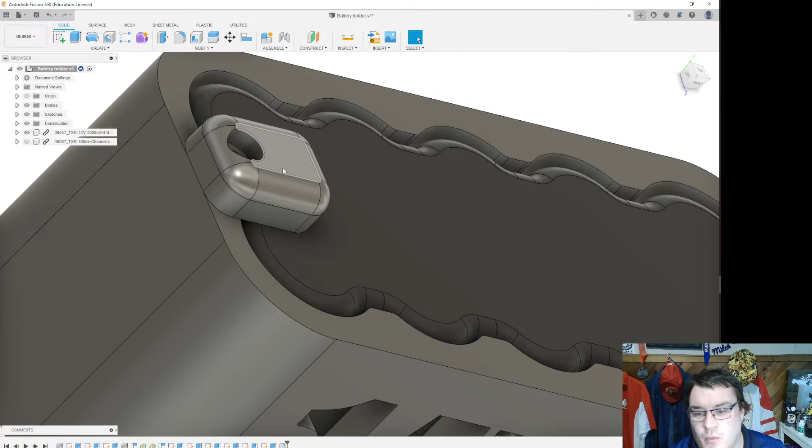I'm going to click here. I know that this is centered, so I can draw a quick construction line down, and I know I've got about 4.5 millimeters of bolt thickness here. I might do about the same thing, maybe 5 millimeters of thickness here.

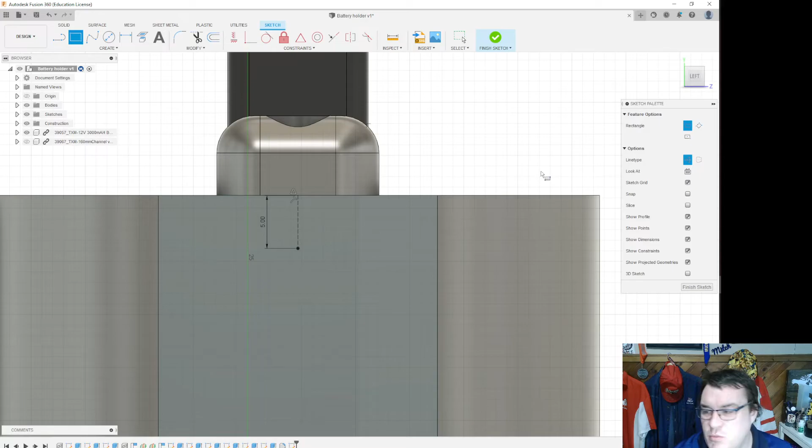I'm going to create a 2-point rectangle. I'm going to make it not a construction line, and I'm going to make it a fairly arbitrary space here. I'm actually going to use what's called a move command. We haven't used this one yet, but a move command is really, really useful. It's in the Modify menu, and it's going to use a specific kind called point to point.

Point to point is going to let me select the middle of this line and the end of this line. Before I do this, let me try this one more time. We're going to click the move button, click on the actual rectangle we're working with, and then go point to point.

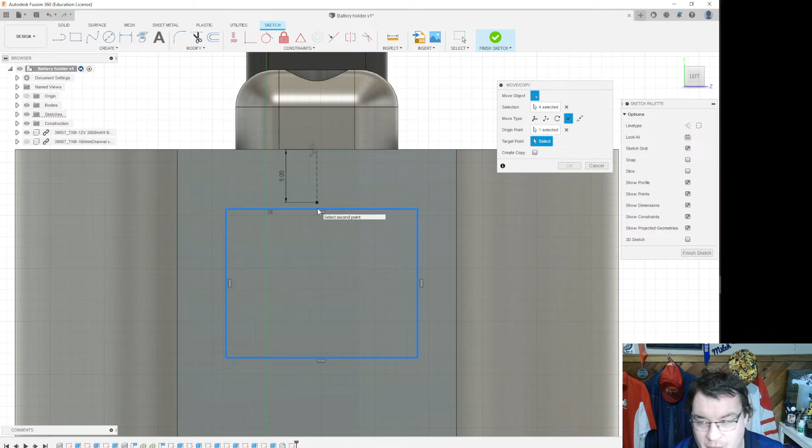Then we are going to click the center of this line as our origin point, and our target point is the end of this line, and it'll align it, just kind of how we aligned the Tetrix bar before. I'm going to press OK, and since I've kind of accepted that I'm going to have some support material for the 3D print in the team number, I could probably do this one with support material too.

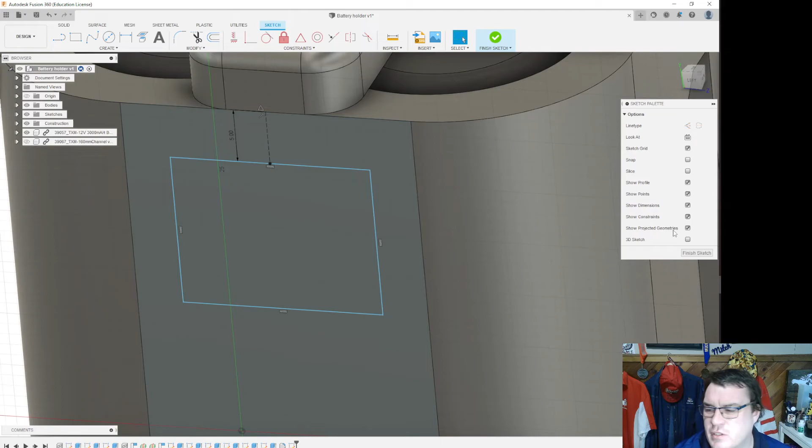Click Finish Sketch. I'm going to click Extrude, and I'm actually going to extrude this. If I wanted to, I could extrude this the whole way through using the same trick we did before, where we'd extrude it to, let's say, the inside edge of this. Why don't we do that? Let's do this in a really proper way.

Okay, now I've got an access port on this side. I could actually probably, if I wanted to, make that the whole height of this. To do that, I just go into Sketches, identify the sketch that caused it, and maybe decide, hey, this sketch, definitely not long enough, let's make it a little bit deeper. Okay, Finish Sketch, there we go.

That's a much lighter 3D printed part, especially if I'm going to do support material. Again, I'll knock that out when I'm done with the 3D print, and life will be good.

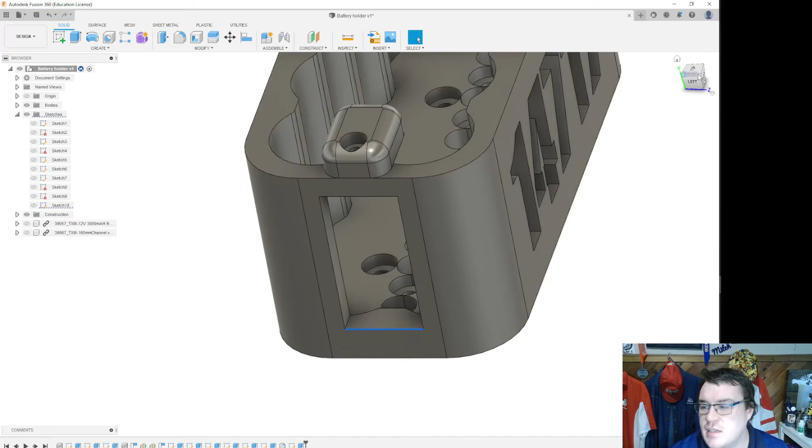Last thing I probably need to do is put a hole in the thing for the M3 screw, so I'm just going to create a brand new sketch. Oop, that went in the wrong plane. If you created a sketch you don't want, like sketch 11 here that I didn't want, you can go back into your sketch menu and delete that.

In this case, I'm going to create a sketch. I'm going to click on the bottom here, scroll out to my view cube a little bit, and use my project button to put the correct size hole on there, and cut that out and finish my sketch and use it as an extrusion.

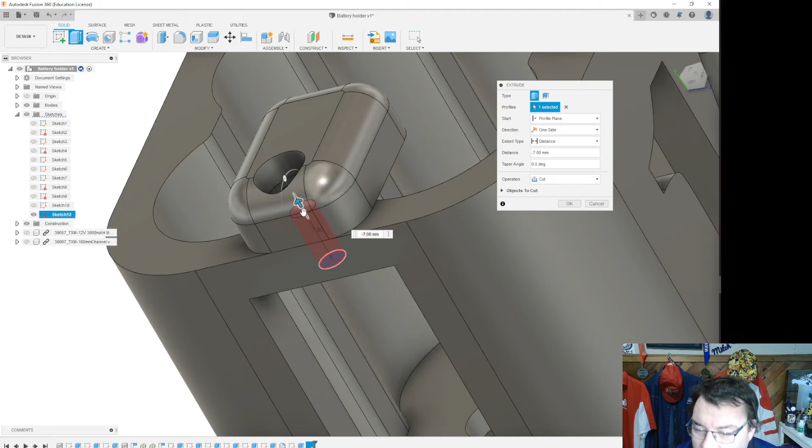Now, at this point, we have something that is actually pretty good here. We have something that we can definitely work with. I'm going to use the same trick there, go to an object and just cut it to there.

Now, I realize we've actually created a bit of a slight problem. Right now, I actually have two bodies. I have this body and I have this body, and that's lucky - it's actually really lucky that I ended up with two and didn't end up with one here. So I'm going to take my first body, which is this clip, and I'm going to have to print it as a separate part.

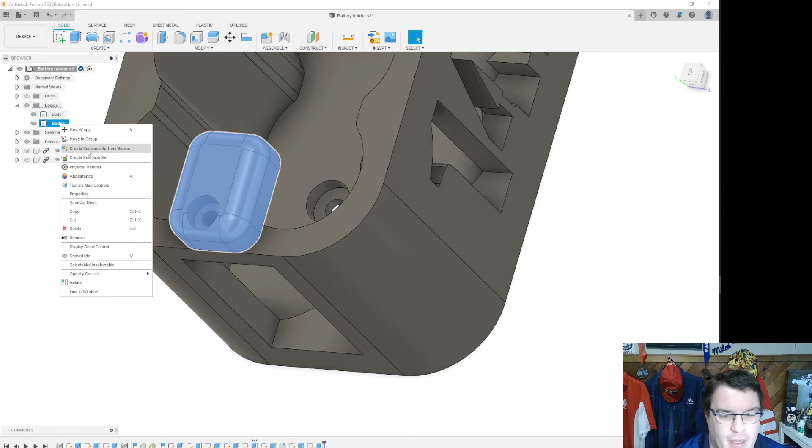So I'm going to right click on it and go Create Components from Bodies. Notice that it came out as Component 1. I'm going to rename it Hold Down Clip. Name your file so you know what you're looking at. Once it's a new component, you'll notice I can actually move it around now. It can become its own thing, which is fine.

We're going to export it as a separate file for 3D printing. Now I've got another body here. I'm going to do the exact same thing to this, and I'm going to call this main battery body. Believe it or not, I now have something here that I can actually work with.

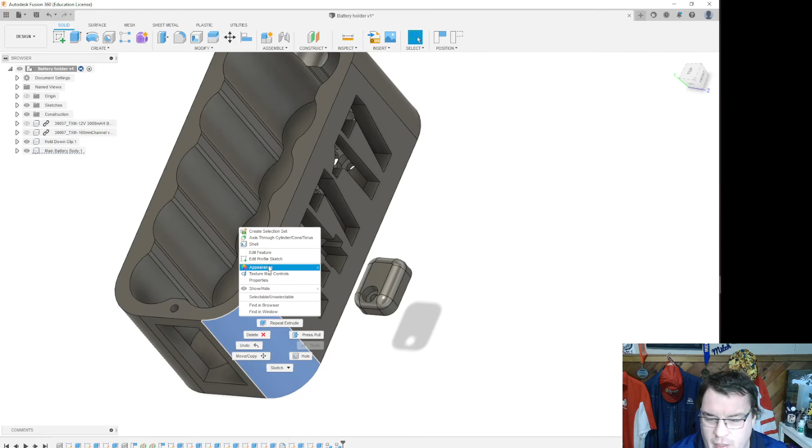If you're going to present this to somebody, it's possible you want to change the color on it. There's a few other tricks you can do in Fusion here. I'm going to change these quickly to be white ABS or white PLA plastic, which is what I'm going to print them out of, by going down in the Appearances menu, clicking on Plastic, and using ABS for this one. It will, for all intents and purposes, do exactly what I need it to do.

And there we go, now we have two parts. This is a really good battery holder, something that we can work with. We may want to go to the other side and put our team number in, or just pop a bunch of holes in this thing to make it lighter. That's all good, use less plastic, nothing wrong with that. That being said, to throw this into the 3D printer, we have one last thing we want to do.

We want to turn this into an STL file or another 3D printable file. We're going to go to our File menu, then to 3D Print. The 3D Print menu is going to come up and ask what you want to do. If you're comfortable with STLs, please use STLs. Unit type is millimeters because that's what we drew this in.

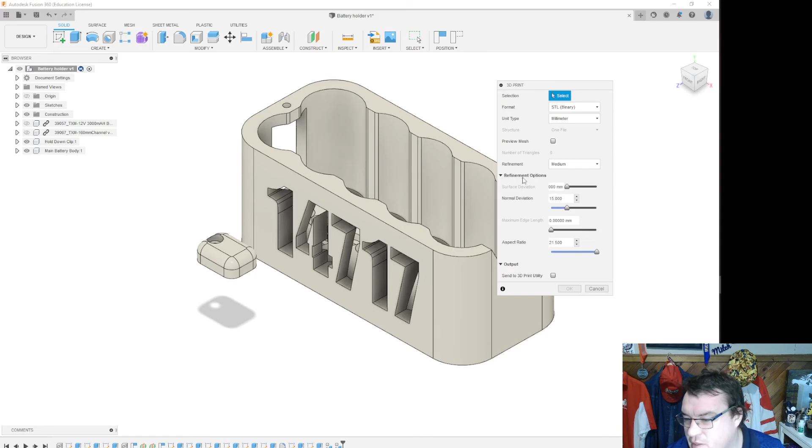From here we're going to uncheck the 3D Print utility. If you're using your own 3D printer, that's not really useful for sending it to other organizations. We have a few options for refinement and stuff like that, but I usually use the default. They're not that problematic.

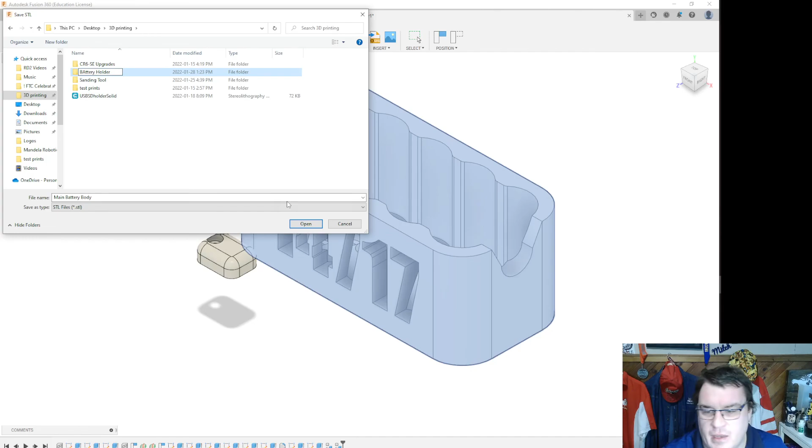Now I'm going to select the parts I want to 3D print, so I'm going to select my main battery body and press OK. It's going to pop up, and in this case I have a 3D printing folder I'm going to use for this. I actually go main battery body. Excellent, I might create a new folder here. Folder management is important, so we're going to call this battery holder. From there, we're going to jump into battery holder and throw in the main battery body.

We're going to do the same thing for the other piece. I'm just very quickly going to 3D print that, selecting the other piece and moving it over, and it is battery clip.

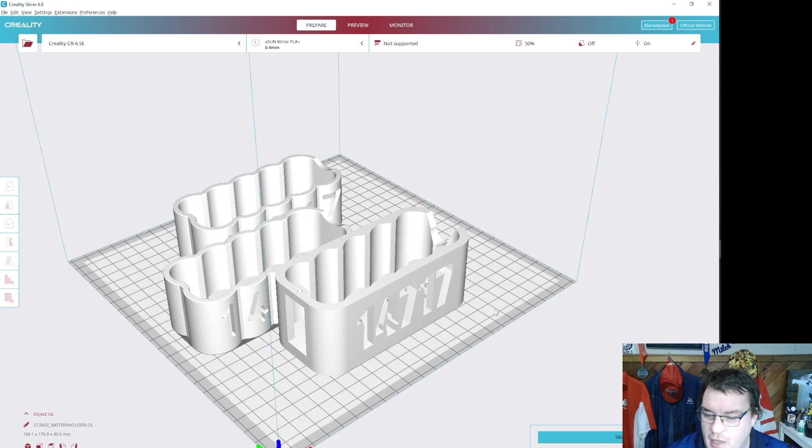From here I can jump back into Creality Slicer, and I can pull these 3D printed objects back into this space and make sure they show up the way they're supposed to. At the end of the day, I go back to my 3D printing folder, my battery holder folder, and my main battery body, and you can see this is about the same size as that other one. Spin it around, put it down here, and we can have something that might be just a little bit more functional because we've spent a little more time with this.